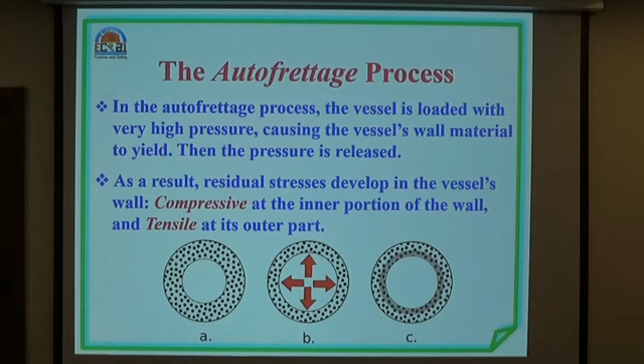Now, the presence of autofrettage has two advantages. The one, which was the initial imagination of that artillery officer, is to allow an increase of the vessel's internal pressure, which is evidently clear.

But with the years, we found out there is a second advantage due to the fact that the stresses at the inner portion, which is the place where cracks start or initiate, if you have compressive stresses, this will decrease the susceptibility of cracking. So it is better for fatigue life, better for firing power, so everybody should be very happy, except it is very expensive to do.

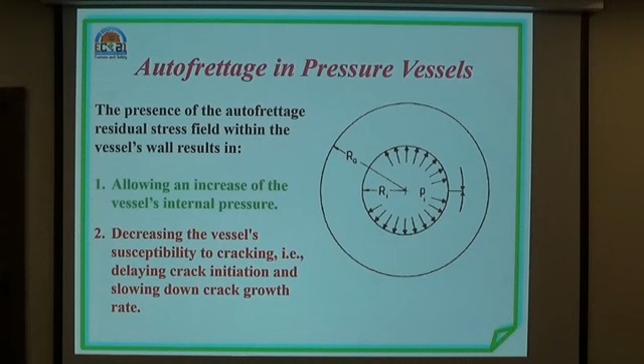Spherical pressure vessels are used a lot in industry. They have a big advantage because they sustain a much higher pressure than cylindrical pressure vessels. They are more complicated to manufacture, and the problem is that nobody ever gave any attention to the question of whether we can put autofrettage in spherical pressure vessels.

To the best of my knowledge, and I have a little bit of experience, nobody has ever used autofrettage in spherical pressure vessels. And the question was, is it feasible, is it good in pressure vessels, and how much does it affect the fatigue life of such a pressure vessel?

You should be very much aware, because we live in a world where every morning there's another attack, here or there or somewhere, and police all over the world are using particular pressure vessels to detonate bombs that they find. They find a bomb, they put it into a big spherical pressure vessel, and they detonate it.

Now, if you look at them in the United States, every police station has such a big sphere, which is very heavy, and it would be very interesting to find out if autofrettage would help, first of all, to detonate much higher pressures. Secondly, will it sustain a much longer fatigue life?

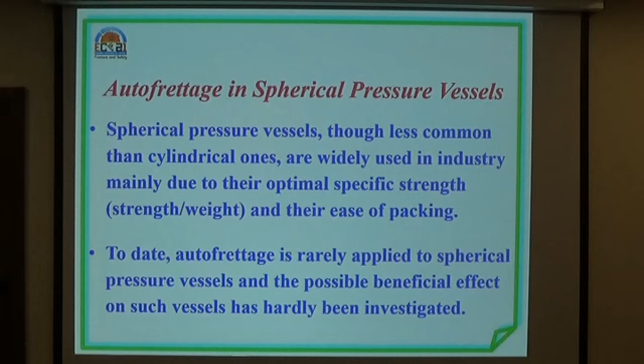Very interesting. So we went further on, and what we are trying to learn in this case - I'll put them all three - is, on the one hand, what is the stress intensity factor at a crack, at an inner crack, which results from the internal pressure. Then we have a positive stress intensity factor.

By the way, its sign is negative, which is due to the residual stresses due to autofrettage. And finally, the combined stress intensity factor, which will dictate the fatigue life of the vessel.

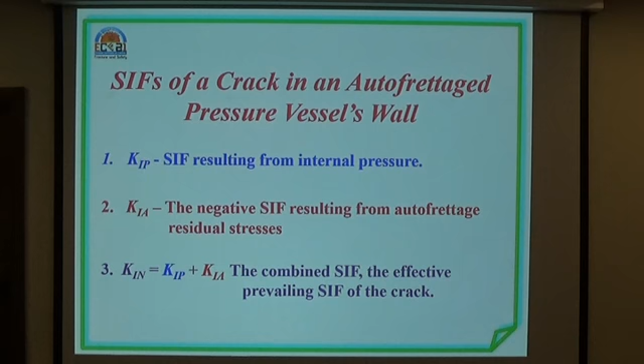So in order to do so, we try to calculate many K1A's and K1P's, and I'm just giving a very brief description of the cracks. Cracks in spherical pressure vessels are very different than in cylinders because of the curved part of the vessel inside, and we have lunular cracks, which are circular, and semi-elliptical cracks as in cylinders.

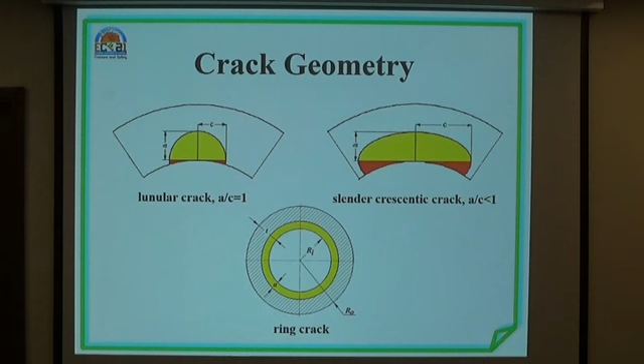And I would say something about ring cracks, because many people who want to analyze such a problem say, okay, we'll take a ring crack as an approximation and it is always very good. No, it is not. So let's go and see.

Here are the three descriptions of the three configurations of the cracks. We did a finite element analysis, three-dimensional, and the residual stress field, which is the most important thing in this story, is applied to the finite element analysis using an equivalent temperature field.

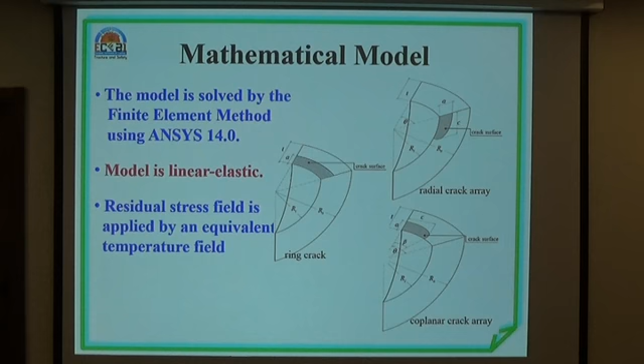This is an old trick which is not known to everyone. In the case of autofrettage, it is possible to determine a particular temperature field that will create the same stresses as the residual field. This is introduced into the analysis, because putting residual stresses directly into a finite element analysis is not very simple. If there were civil engineers here, they would know what I'm talking about.

Well, and then you calculate a J integral, which is embedded in the software. We are not geniuses, we use whatever exists.

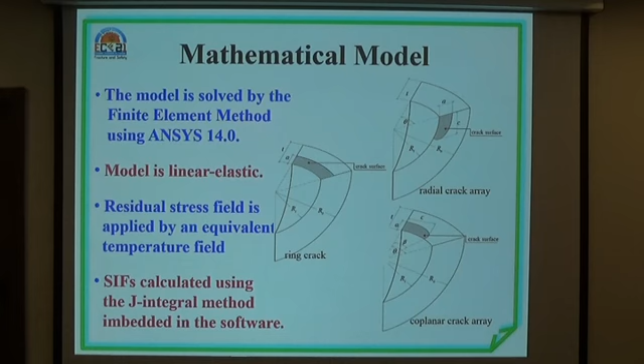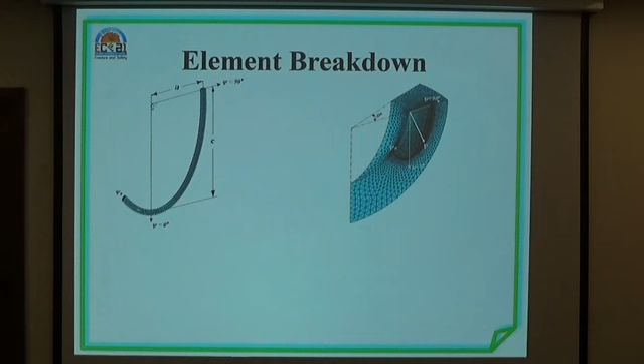You have an element breakdown, and unlike in the case of the tooth that was described here beforehand, in this three-dimensional analysis, we are using particular elements which give you the right singularity on the crack front, the R to minus half. These are special wedges, and it is easy to have them in any finite element program. If you wish, I will tell you a little bit later on.

So we have the crack front curve with 20-node isoparametric elements collapsed to wedges, and then on top another 4 layers of 20-node isoparametric elements. Finally, the rest of the model, in order to save computational time and memory, is with 10-node tetrahedrons.

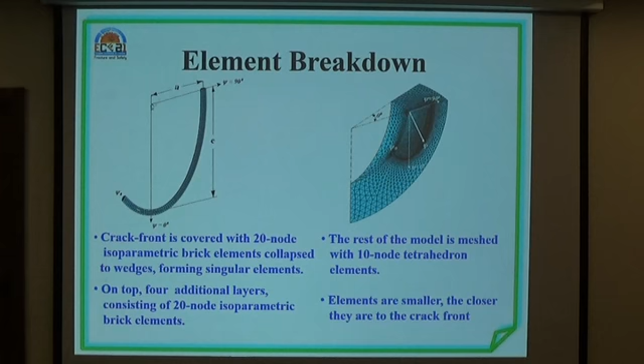Okay, we are now ready to show some results. Of course, we start with small elements near the crack front, and bigger as we go far away, in order to keep the accuracy reasonable.

And the autofrettage model is the greatest secret. Autofrettage was first analyzed analytically by Hill, a British gentleman. He did a beautiful model, which is not realistic because it's beautiful. This model has been used for many years.

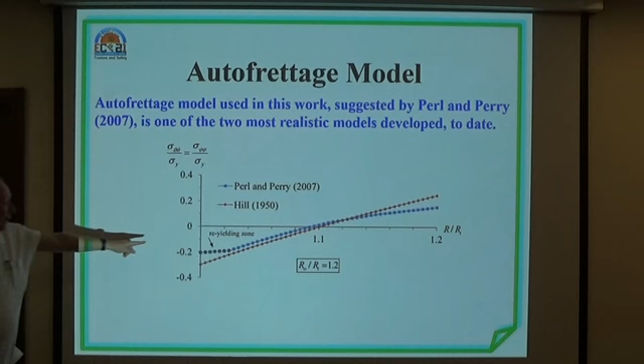Now, the latest model was developed by a student of mine and myself in 2007, which is very realistic. When you look at the two models, they seem almost the same thing. The problem is that the most important part is at this point, at the inner surface, and here you can see there is a big gap between the two models.

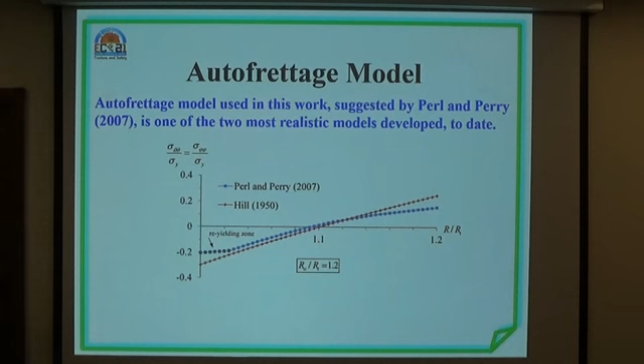So if you use Hill's model, it is extremely optimistic, and we are realistic people, not optimistic. So we've used our residual stress field, and we used it with, as I said, an equivalent temperature field. And we solved many cases.

I'll put them all just to show you how much work we did. We used it for two basic crack configurations: radial cracks, because many spherical pressure vessels are manufactured from petals, and in between the petals you can have cracks; and also coplanar cracks, namely you have two hemispheres welded together, and on the equatorial plane you can have more than one crack. Altogether in this case we solved 300 three-dimensional cases.

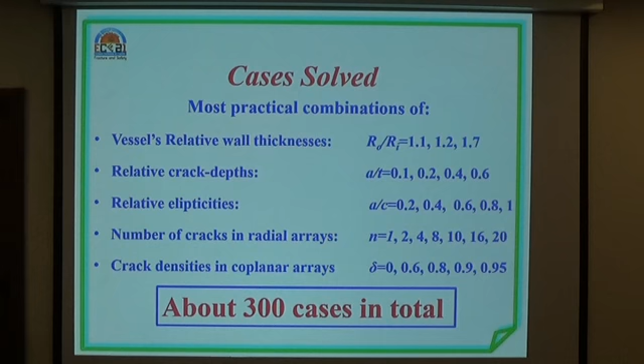An excellent student, Matan, did the work. He deserves all the credit. I was just thanking him. Let me show some results.

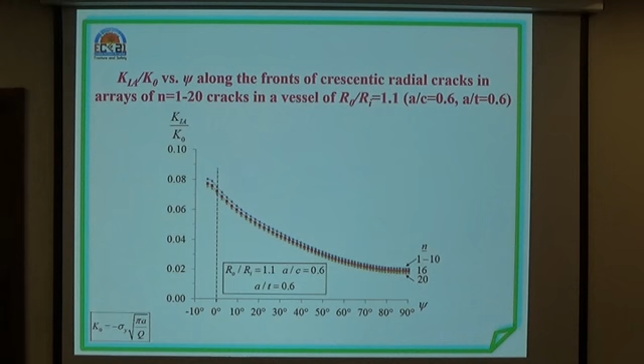They are very different from what is happening in a cylinder. For example, in a relatively thin spherical pressure vessel with radial cracks, the number of cracks around has almost no influence, because it's a very narrow band. If you take the same configuration but with a thick sphere, look what happens.

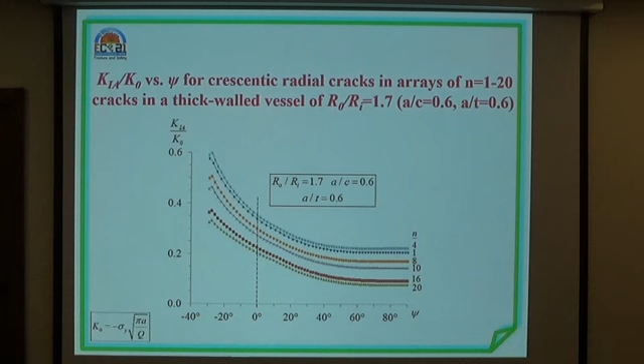Two interesting things here. First, as the number of cracks increases, we have a decrease in the stress intensity factor. Secondly, one crack is not the most critical case. People thought for many years that one crack, sometimes two cracks, is the most critical situation. This is not true. Sometimes it is 4 cracks, even 8 cracks. In this case, it is 4 cracks.

If we now look at the stress intensity factor due to autofrettage in the vessel, for a coplanar crack array, we can see as the density increases, of course, the stress intensity factor increases because the cracks are becoming closer and closer.

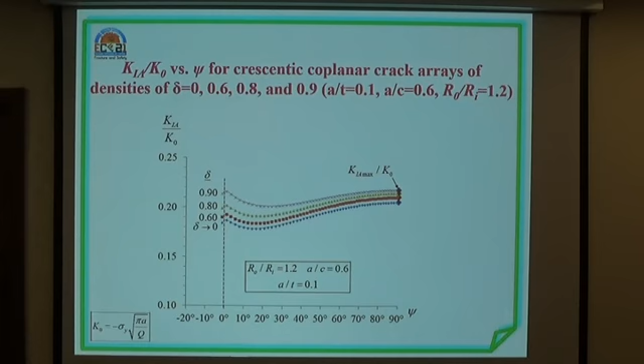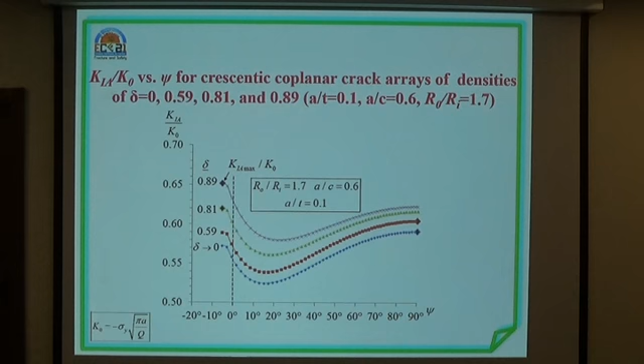Another thing people are convinced of is where the maximum stress intensity factor occurs. You can see in this case it is at 90 degrees, the deepest point of the crack. This is not always the case. Sometimes it is at the surface where the crack meets the internal surface, and I'll show you immediately. You can see here two maxima, and there, two maxima, so it depends on the particular geometry of the problem. So never say again that the inner point or the intersection point is always the most critical - one of them is.

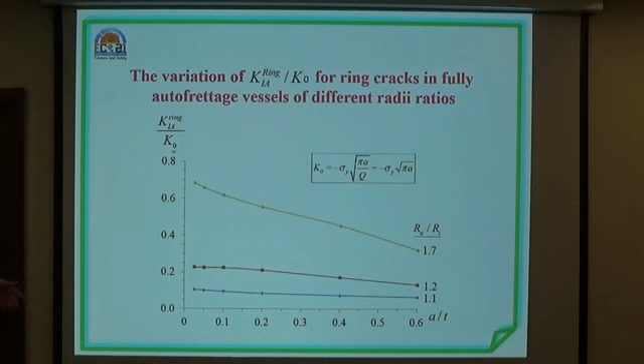Ring cracks have been used when you have many cracks on a plane. We said, okay, make an approximation, say this is one ring crack, and this will always be good. No, it is not. Here you have a ring crack, distribution of the stress intensity factor due to autofrettage, and you see how it behaves with the thickness of the sphere. In this particular case, the solution for the ring crack is higher than the solution for the coplanar cracks, meaning the ring crack is a good upper bound.

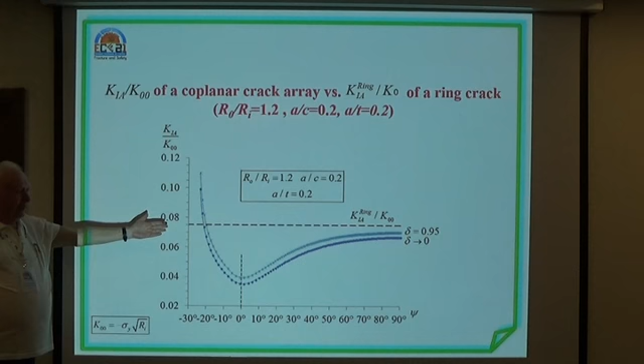But you change a little bit the information, and look what happens. Here you have a case in which the coplanar cracks have a much higher stress intensity factor than the ring crack. As a result - and this is good for the people doing the analysis - you have to come to me to buy the solution for your particular case.

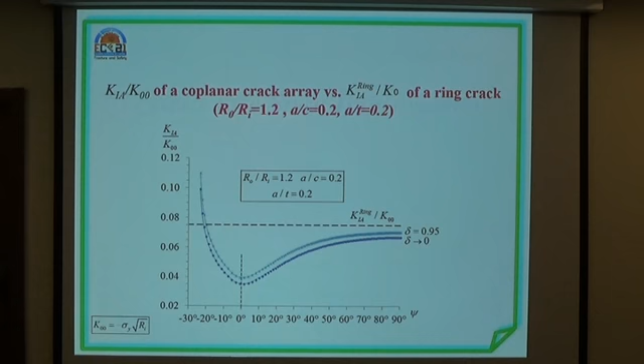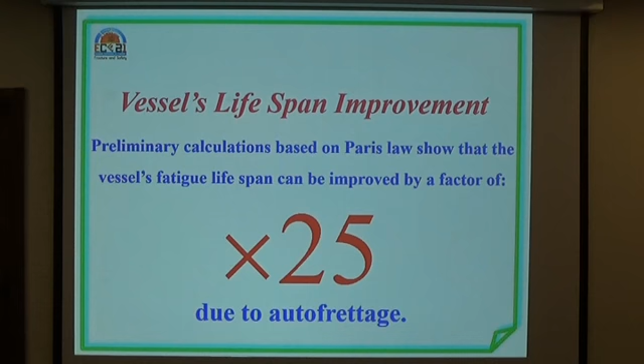Now, what is the impact of autofrettage on the fatigue life of such a sphere? We made a first approximation using Paris law, and this is the answer: you can prolong the fatigue life of such a pressure vessel by 25 times, even if this number is not accurate - and it is not accurate, it's only an approximation. Even if it's 20 times, it's a good job, a good business.

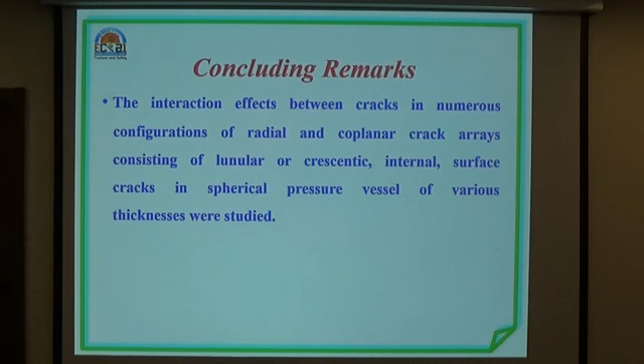Let me just say one thing. Actually, what we did was analyze the interaction between cracks in various configurations of radial and coplanar cracks, of all configurations described here, and we saw the variation of the stress intensity factor due to autofrettage. I didn't show the one due to internal pressure because this is considered simple - it's not so simple either.

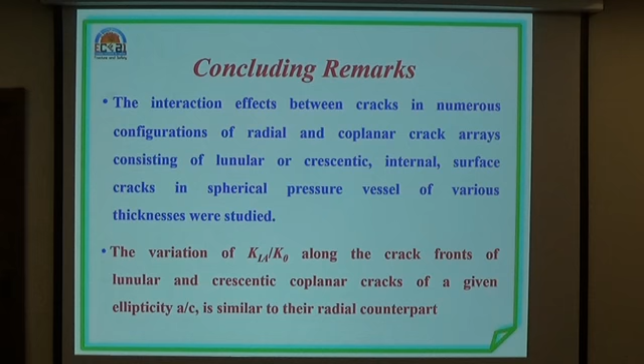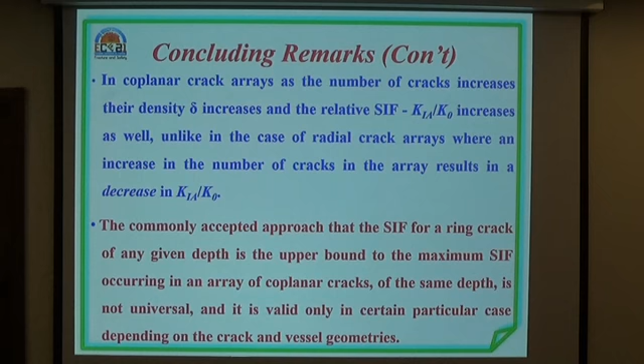And we saw that density of cracks has a different effect on radial cracks versus coplanar cracks. In radial cracks, it decreases the stress intensity factor. In coplanar cracks, it increases the stress intensity factor. And finally, the commonly accepted approach that the ring case is the upper limit to the problem is not always the case, to be delicate. Not always the case. Thank you.